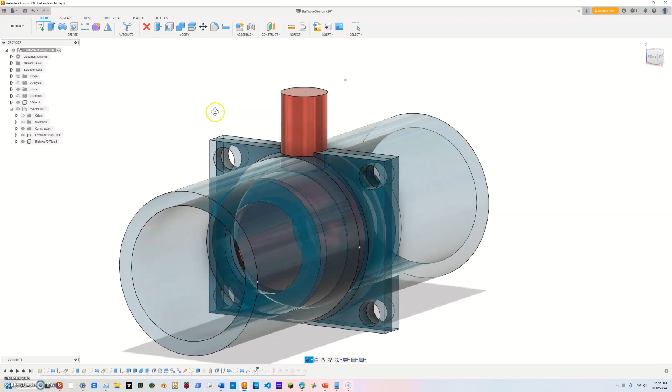Now to demonstrate that, I've added a joint right here. So right now the valve is in the open position, and then with a 90-degree turn you can get the valve in the closed position.

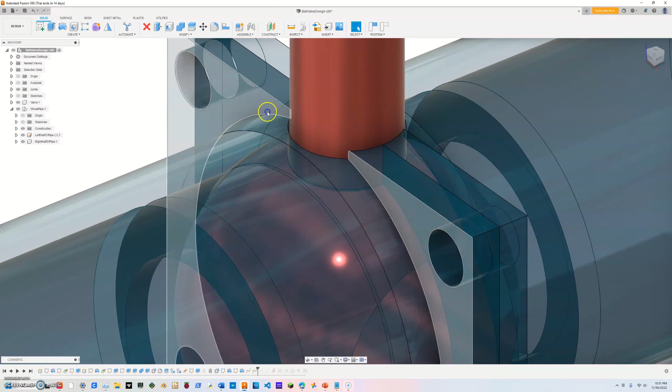And as a little proof of concept, we made a glasses box from a previous lesson, and I noticed that it could hold water. So when I made this, I knew it should hold water, but this is definitely very different, since the glasses box was one component, and this is two, because it has a valve in the pipe. And the little tolerance I added was just enough that the water could come out.

So what I hope to do is add a rubber ring around here. Just imagine that blue was a rubber ring. That should fix the problem, hopefully, and I can have it watertight.

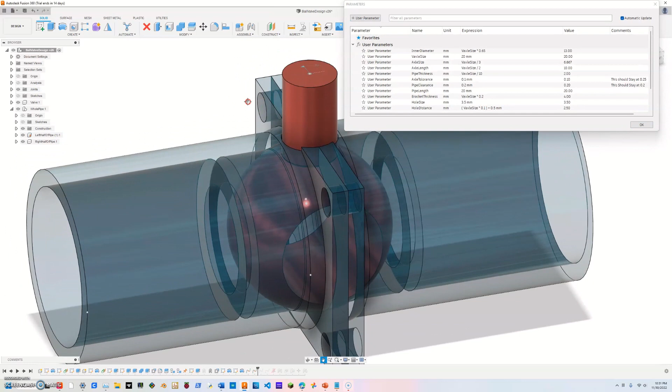And like I said, it is fully parameterized, which I think is a really cool feature about this. So right now it's at 20 millimeters, and this is the valve diameter. And most of these parameters are based off of that. So if I make it from 20 millimeters to 40, you get a bigger valve, and everything else will correspond.

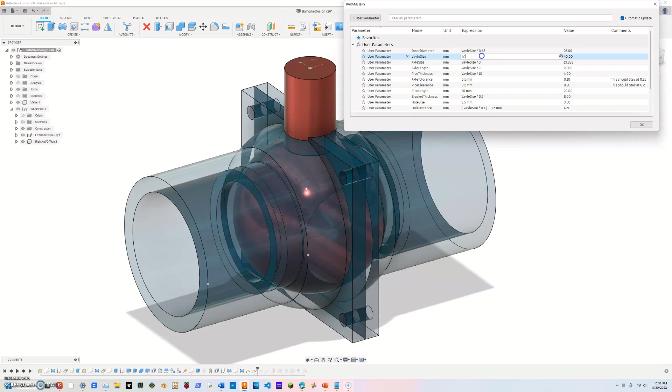I can even make it sizes up to 100, and then you get this weird, massive valve. Or even for fun, you can get 150 or 200. You get these massive valves. But I do not want a 200 millimeter valve. I want a 20. Let me zoom back in.

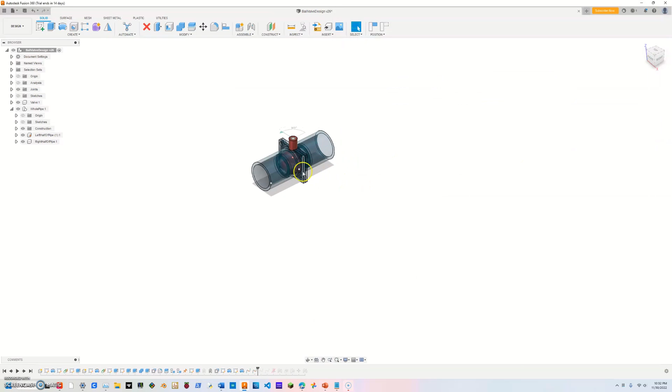Now, if you've noticed, there's this line right here, and that is basically because right now this is not the proper orientation we print in. There would be way too many supports, and it's just all unnecessary. So I just split up the pipe into the left half and the right half.

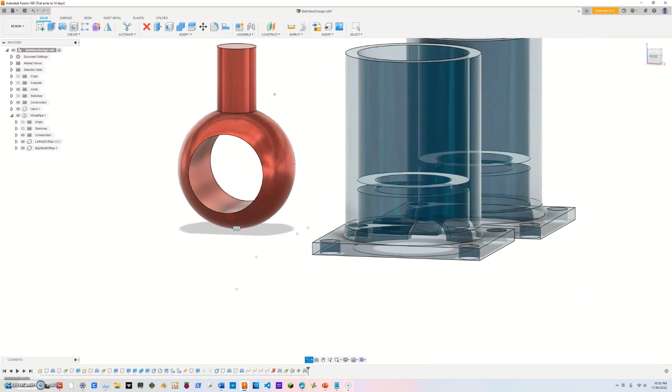And basically, when I go to print it, it'll be in this orientation right here. There will be supports needed here on the base of the valve, and then supports where the rubber ring will go.

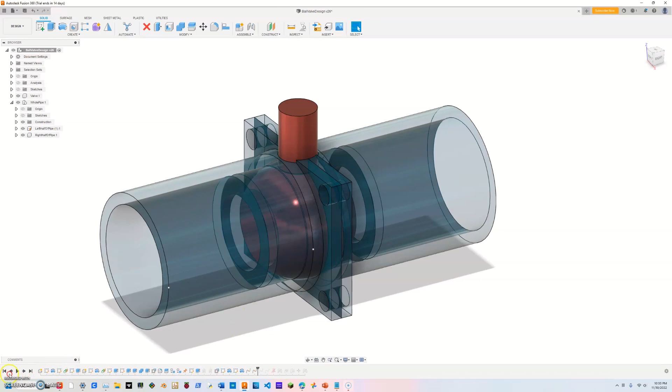And it's just a really cool project that I've been working on, and I thought I would show it because Paul McWhorter was talking about a design that used Revolve, and this actually used Revolve a couple of times, and I think it's pretty interesting to see the design being made. Let me get the sketches on.

So for those of you who want to watch this stuff, you're welcome to stay on, but for those of you who want to go, bye. But here is the design history.